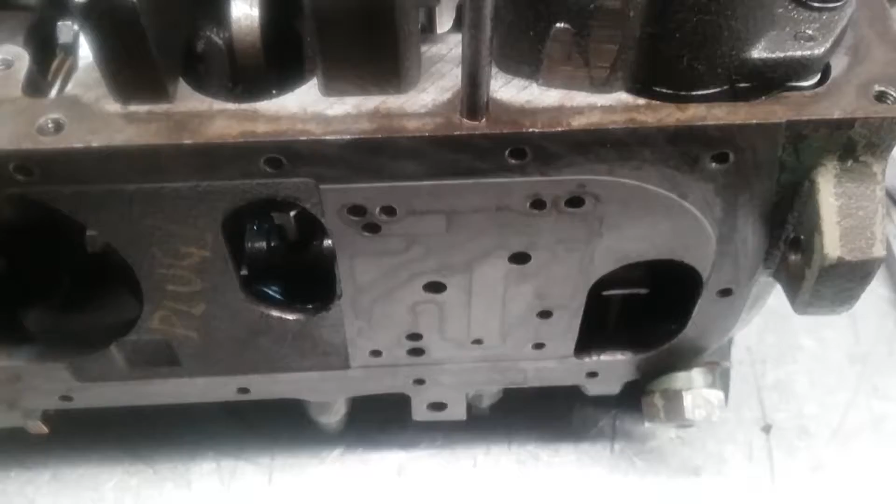Hi, this is a short video of how I confirmed the adjusting pin used to set up the front servo on an old original style Hydramatic transmission. This particular one is a 1945 unit out of an M24 Chaffee tank.

This is the front servo. Those are the bands, you can see they're loose. The servo's not applied, unlike the rear one. The front one's natural position is with the rod retracted and the band not clamped around the drum. These trannies, I don't think all trannies had this, maybe not even many, but these trannies have an adjusting pin that allows you to do an external adjustment, which is quite handy.

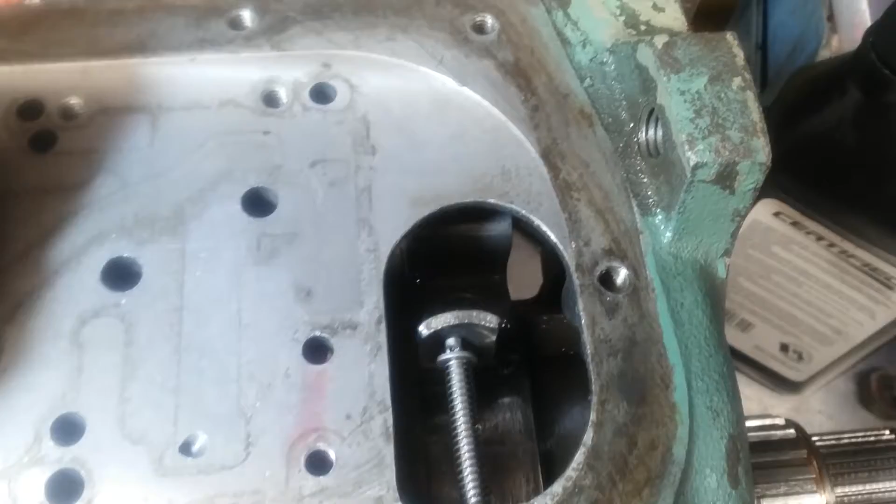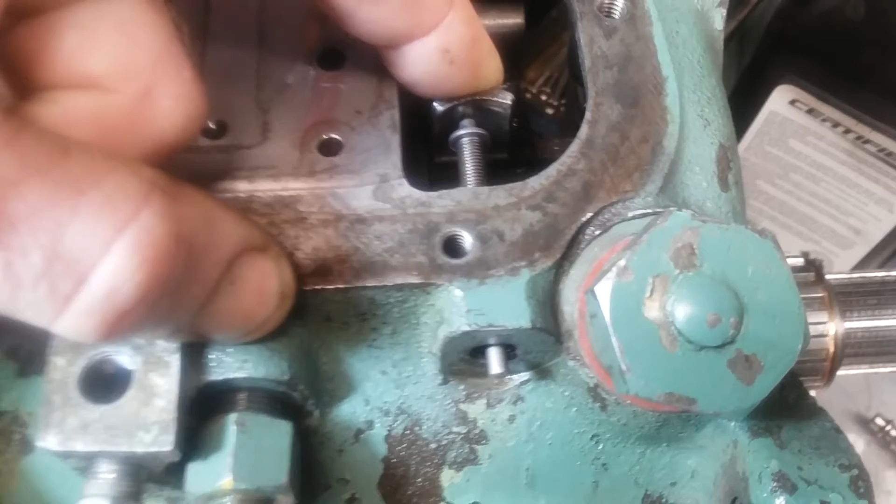You can just barely see it here. Let me flip this tranny over. There's the pin there, this guy with the light spring. There's an extra tongue on the band here, which when the servo operates the band and pushes it down, the pin extends, and it's supposed to - the end of the pin is supposed to line up with the face of that boss. So this one here is extended too far.

And that's because I've got the adjusting screw backed off here. I don't know if this pin is the correct one - I see that you actually have to install a new pin and cut it to length every time you install a new band. I wanted to try and confirm this band was correct, and the pin could be used to set up the band.

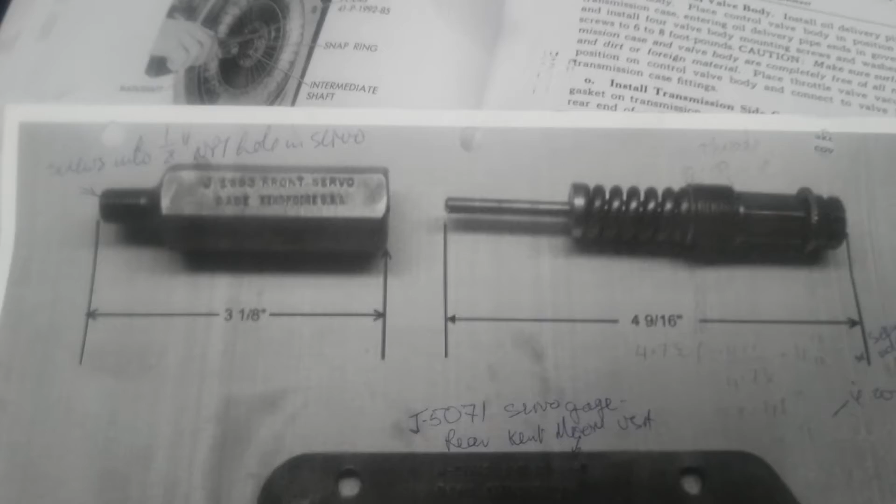So I found this is the tool commonly used for setting up the front band. It's a J1693, I think. This is a picture I found on autotran.com. It looks like this, and I figured out how it works, so I made up a simple version of it that I could use quickly.

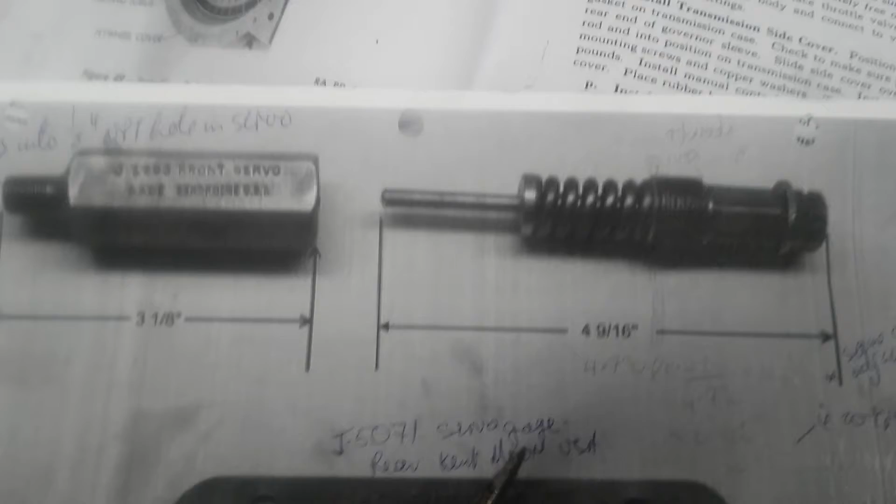Luckily, Autotran put some dimensions on this, so I used these dimensions to figure out what diameter that thread was. That's the critical thread - it's half inch, 20 threads per inch.

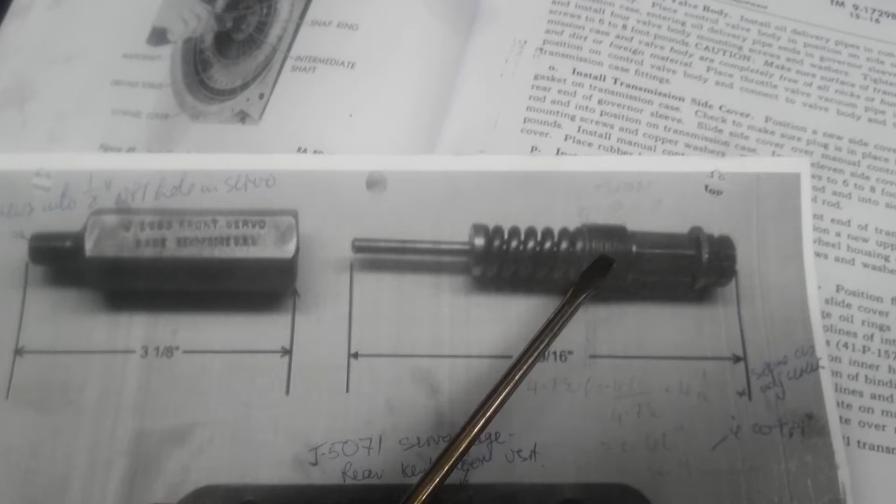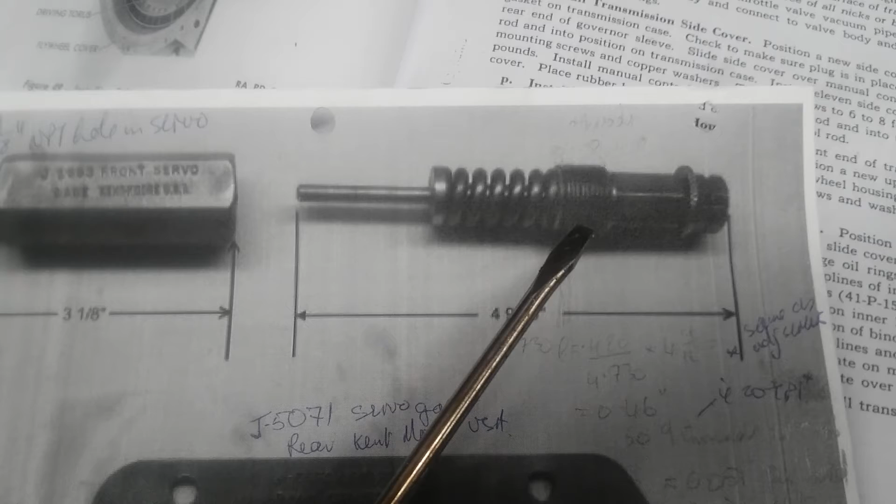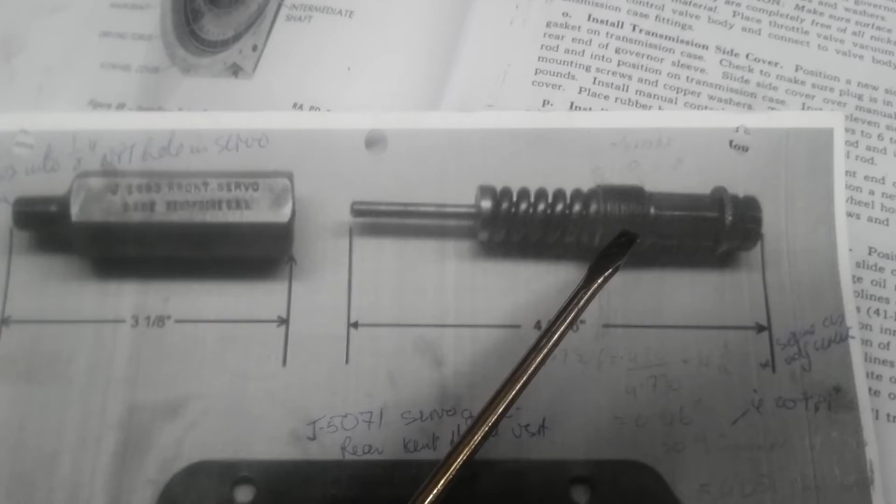So I now know that for this tranny, this part of the tool is screwed in 6 turns to adjust the adjusting nut. And 6 turns on 20 threads per inch is exactly 0.3 of an inch, 300 thou. So I know I've got to use this tool to push the apply piston down 300 thou, or at least make up a tool that can push the apply piston down 300 thou - basically do the same as this tool.

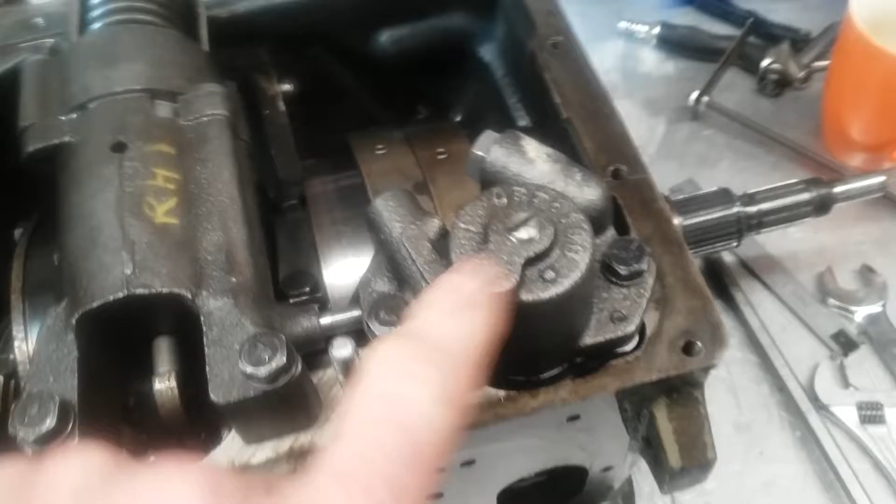So that's done. That tool mounts on the end of the servo where this little pipe plug comes out - it's a little 1/8 pipe plug - and if you look down in there you can see the top of the apply piston. That's what this pin pushes down on when you screw the tool in 6 or 7 or 8 turns. I've seen various numbers depending on the tranny.

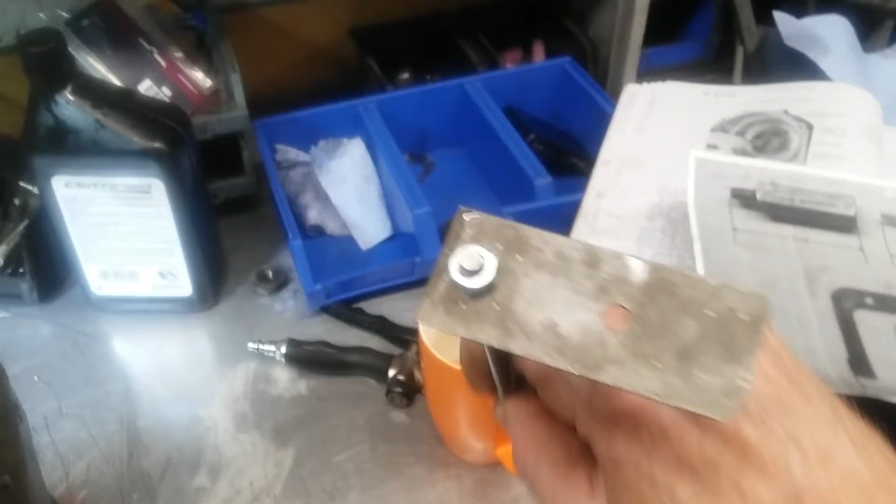So I made up a little tool. It looks like this: a 1/8 pipe nipple, drilled and tapped for a 1/4 inch threaded rod, with a piece of plate on top that just makes it easy for me to count the number of turns.

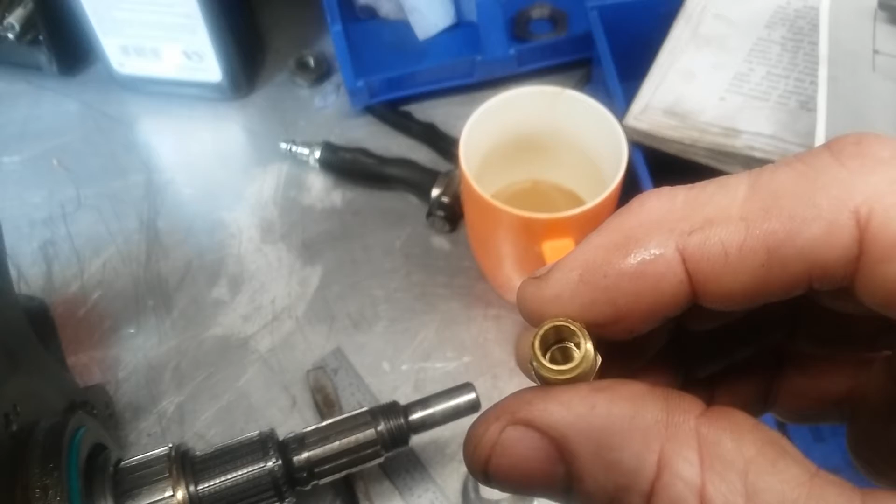What I did with the pipe nipple, which you can buy - it's a brass one, easy to drill and tap, you can buy these at any plumbing store - I drilled and tapped it 1/4 inch 28 about halfway through, and I counter-bored it the other end, 17/64 I think, just so I wouldn't have to tap it the full length.

That screws into the servo until it just snugs up, and then you screw in this part of the tool. And the instructions for the proper tool say screw it in until you feel that rod just touch the top of the piston. And it's very obvious when it does.

You can feel it quite distinctly. Turns freely, and then there, stops, hits the piston and stops. Starts to get harder to turn. The other thing you've got to do, or you should do when you're using this tool, is back off the band adjusting nut at the bottom, which I have already.

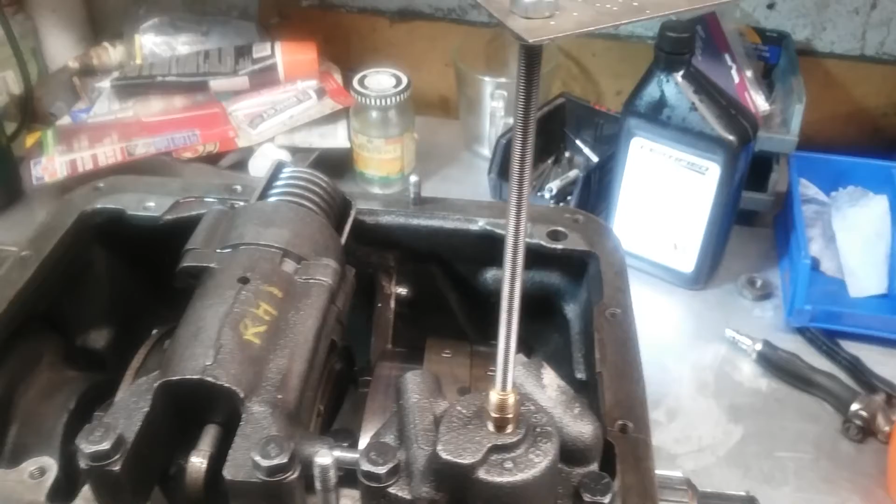So now instead of screwing in this 1/2 inch 20 by 6 turns, or 300 thou, I've got to screw in this 1/4-28 by 300 thou, and you do the simple math, and 300 thou equates to 8.4 turns. So 1, 2, 3, 4, 5, 6, 7, 8, and just short of 8.5, 8.4.

That moves the piston down to the apply position where the manual wants it to be, so that you then tighten up the adjuster rod at the bottom. Let me just flip it over. So sorry for the flailing around there.

So if I turn my adjuster rod in now, you can see actually. Oh, it looks good. You can see screwing it in 6 turns moved the adjusting pin to seemingly exactly the right position. Yeah, it's right on the money there.

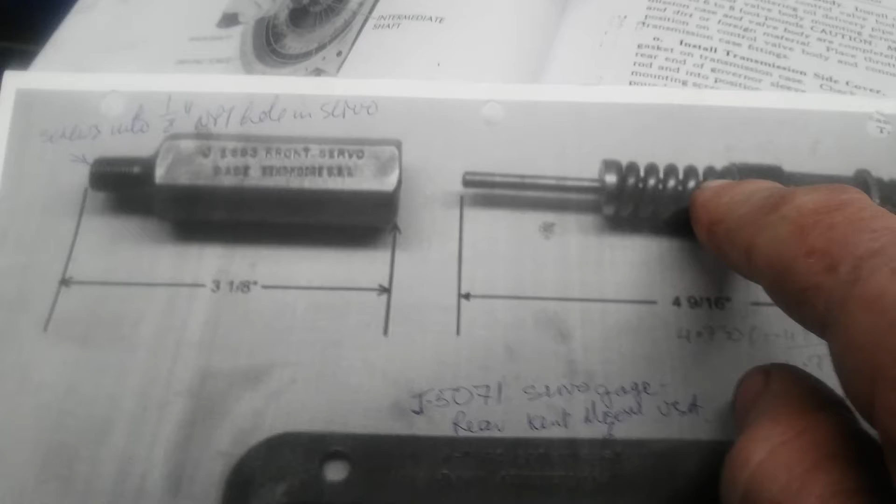So the other part of the tool, which I haven't represented, is this spring. And what this does is, as you screw in the adjusting rod, you start pushing the piston back up against the pin at the top that's holding it, and it compresses the spring, lifts this, pushes this pin out of this holder, and releases this little knurled washer here on top, which is how you know when you've adjusted the adjusting rod on the tranny enough.

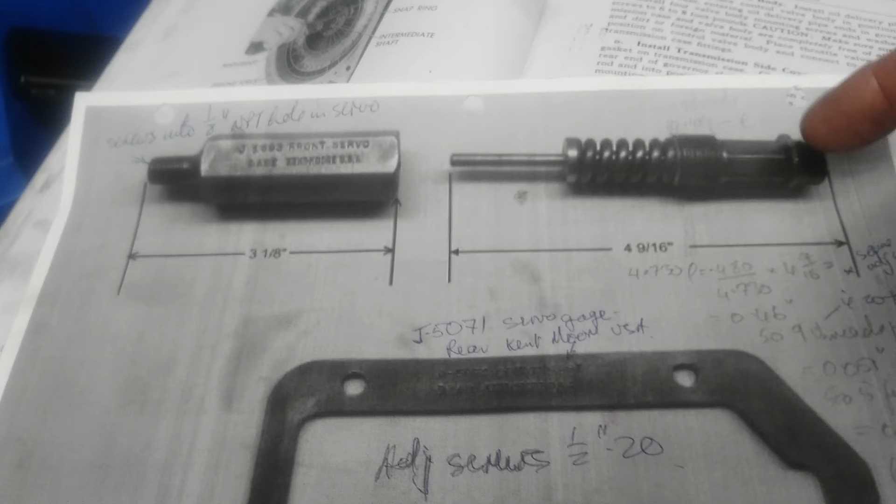Because this little knurled washer, you can start turning it by finger. Basically what that's doing is you're compressing that spring just enough to free up the washer and allow it to turn. I don't have that capability with mine, obviously, so I'm going to rely on feel. And as I said in another video, these bands, there's a very short range between them being loose and being tight. There's not a great deal of variation.

So I'm turning that adjusting screw in until it's snug. In fact, I think if I continued to turn it, I'd move the pin. Yeah, the pin is retracting as I continue to turn it. So basically I can use that. I'll turn that in until it's snug and say I'm done. I would effectively have applied enough force on the proper tool to compress that spring a little bit and release that washer.

So I'm done. I've used the tool, the J5693 tool, or my version of it, to do the adjustment, and I've ended up with the indicating pin in exactly the right position. So I'm good. I know that I've got the correct pin, and I also think I've duplicated the tool for those of you who maybe can't get the tool or want to do a quick adjustment or confirm an adjustment is correct, by using the simple pipe nipple and threaded rod technique.

So all I've got to do now is basically remove the tool, which lets the piston back up. This is coming out quite easily. The piston isn't applying a lot of force on it. Remove the nipple. Screw the pipe plug back in and tighten up this lock nut, and I'm done.